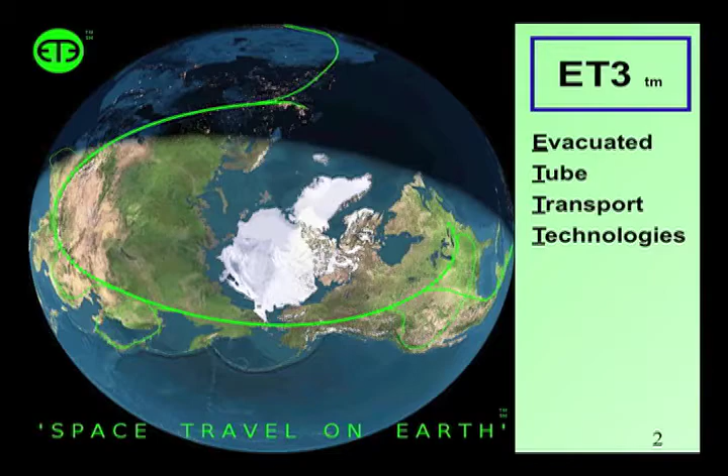So what we're doing, our vision, is bringing space travel conditions down to Earth. The vision is being able to go from, this is a polar view of the world, Florida, we're here in Colorado somewhere, but a person could get from New York up across Canada, across Alaska, across the Bering Strait, across Siberia to Beijing, China in 2 hours at 1/10 of the cost of flying.

Or products could move from any manufacturer in India or any manufacturer in China up across the Bering Strait to any Walmart in the United States in 4 hours or less. A pallet at a time minimum order instead of a shipping container at a time minimum order. And at about 1/10 of the cost.

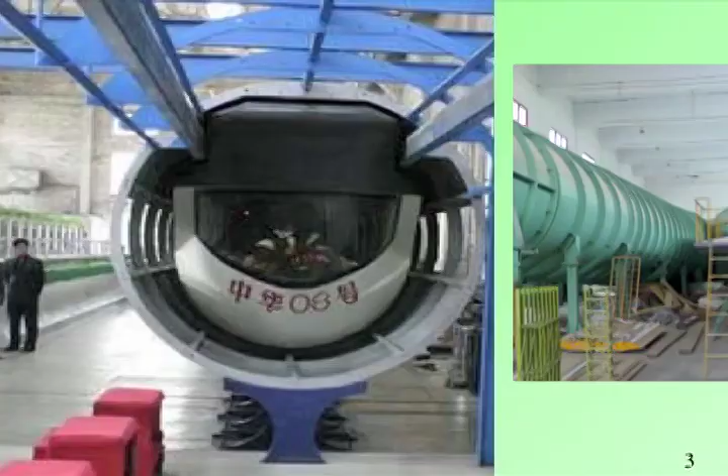Before you stop and say it's a far-fetched idea, recognize that they are doing it in China. They are building evacuated tube transport in China. We lived there for 5 months. The first trip was in the winter of 2002, 2003, and the Chinese have developed a new form of magnetic levitation. It's called HTSM. And how evacuated tube transport works is eliminating almost all of the friction associated with transportation.

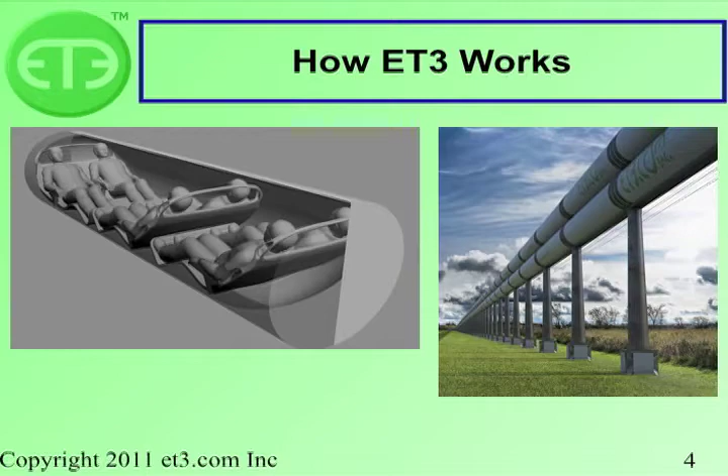When you're driving down the road in a car at 70 miles an hour, about 3/4 of the resistance is aerodynamic and about 25% of the resistance is rolling resistance. The rolling resistance can be eliminated with magnetic levitation, and the aerodynamic resistance can be eliminated by bringing space travel conditions down to Earth.

I believe that this nation should commit itself to achieving the goal, before this decade is out, of landing a man on the moon and returning him safely to the Earth.

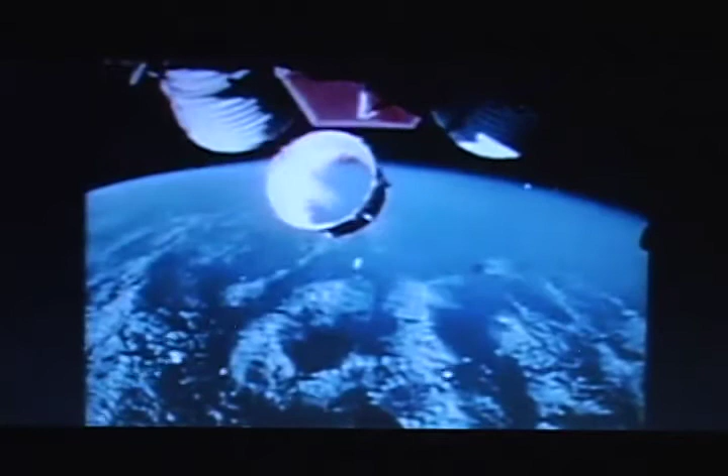The bold move of putting mankind on the moon created vast wealth and prosperity for the United States. U.S. intellectual property value now exceeds our tangible asset worth. Although manufacturing is shifting to Asia, half of global IP licensing income flows to the U.S. Evacuated tube transport is efficiency-improving technology that has benefits far exceeding what NASA created during the 1960s and 70s. Because of exorbitant costs, only a few astronauts ever experienced frictionless travel in orbit. By contrast, ETT will offer an enormous benefit of frictionless space travel on Earth for everyone to enjoy at any time. The value of ETT will dwarf the wealth that NASA-inspired IP and hardware created.

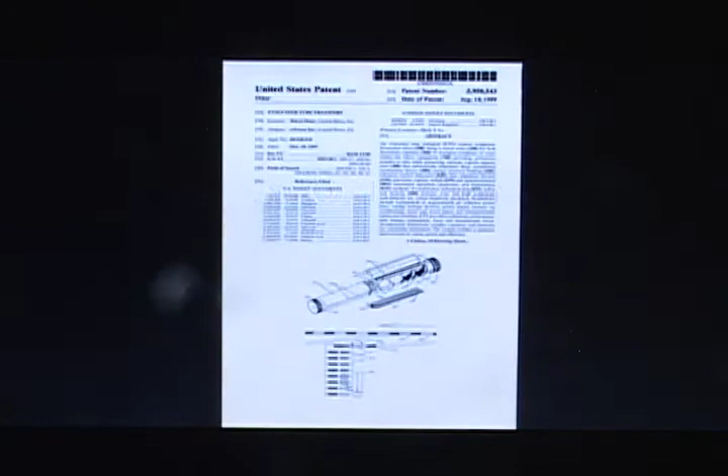The first nations to leverage ETT will trigger and ride a wave of unprecedented global prosperity. ETT will eliminate oil reliance, enhance global security, green the Earth, invigorate stagnant industries, and net millions of high-paying jobs. Most importantly, ETT will stimulate the global economy by availing an extremely high return on investments for companies who build it. ETT is a patented technology where travel occurs without air resistance or rolling resistance.

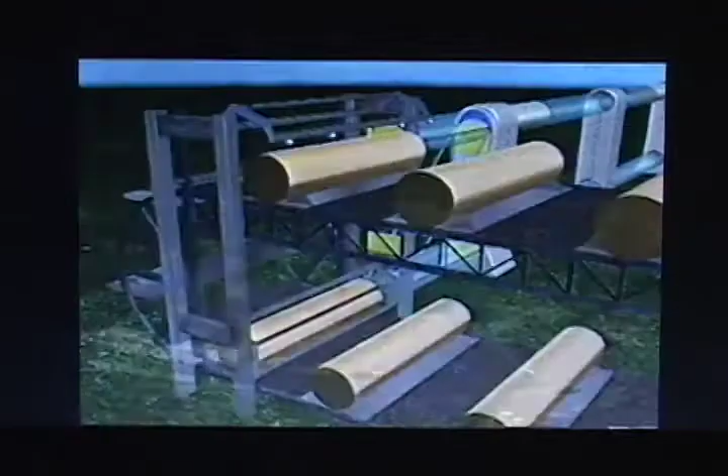ETT can accomplish 50 times more transportation per kilowatt hour than electric cars or trains. ETT is silent, ultra-safe, faster than jets, and is powered by electricity. Air is permanently removed from two 5-foot diameter tubes built along a travel route. ETT is not pneumatic tube transport commonly used at drive-up banks.

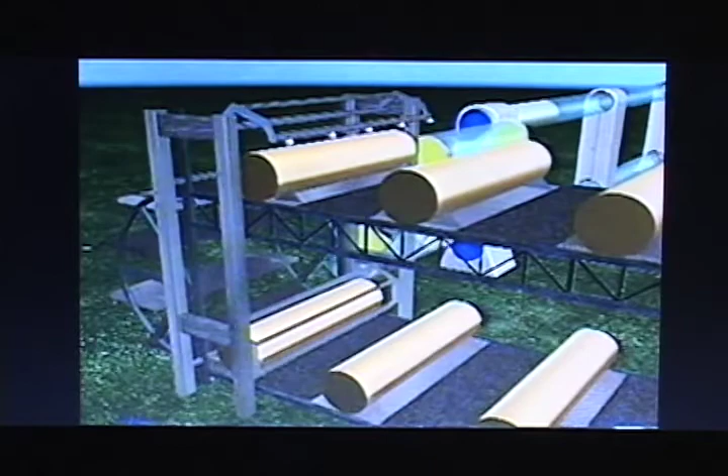Car-sized passenger or cargo capsules travel in the tubes on frictionless magnetic levitation. Airlocks at stations allow transfer without admitting air. Linear motors safely accelerate the capsules. For most of the trip, they coast through the vacuum without using any additional energy. Acceleration energy is recovered at the end of the trip by using linear generators to decelerate the capsules. ETT will eventually serve most homes.

ETT is networked like freeways. The capsules are automatically routed like internet traffic, yet a capsule can exit the system at any desired branch. Speeds of 350 miles per hour for in-state use will develop to 4,000 miles per hour for cross-country. That means New York to LA in 45 minutes, or New York to Beijing, China in just 2 hours.

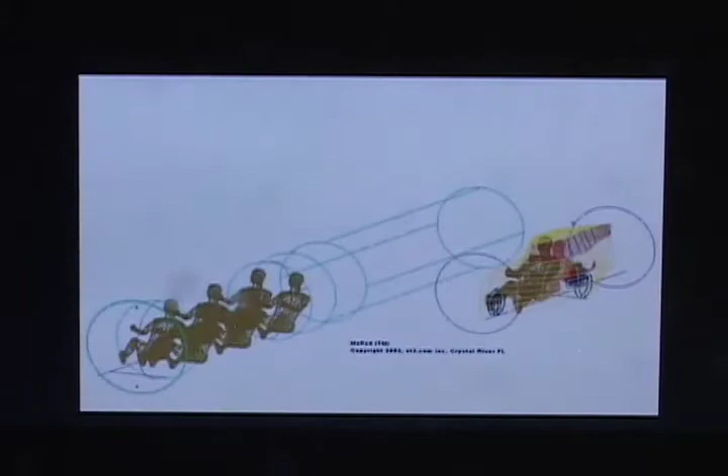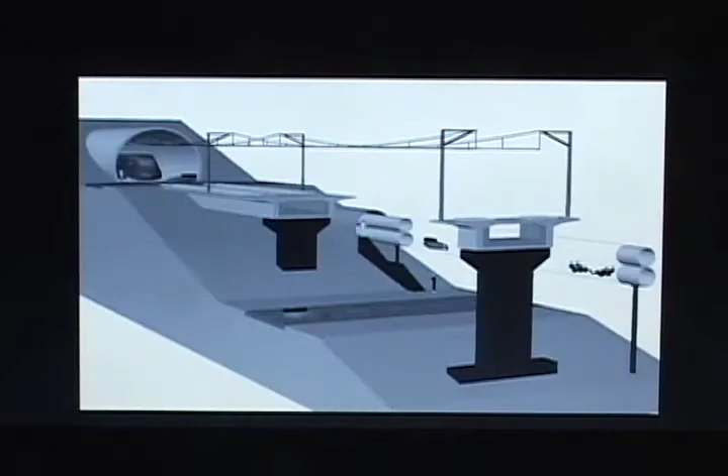Empty ETT capsules weigh 400 pounds, yet can accommodate 6 people or 3 pallets of cargo. Guideways to support ETT capsules require 1/20th the material needed to support trains. Material efficiency and automated production will drop cost to less than 1/10 that of a high-speed rail, or 1/4 as much as a freeway. Automated switching allows 350 mile-per-hour ETT routes to exceed the capacity of a 32-lane freeway.

ETT value will produce ROI high enough to guarantee private investment. ETT benefits will compound for generations. Collectively, companies have invested billions developing ETT, though most are yet unaware of it. For instance, many companies currently produce the hardware and software necessary to build and automate ETT. The technology is owned by ET3.com Incorporated, an open and growing consortium of licensees. These companies and individuals collectively network and leverage their assets to implement, manage, and improve ETT.

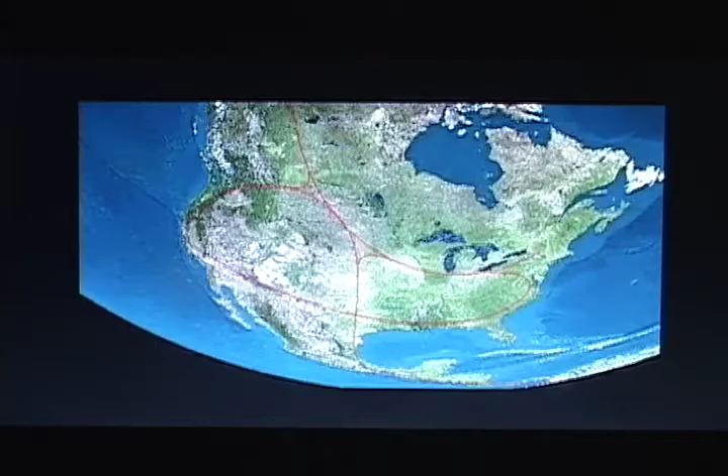Private investment of $500 billion in optimally placed ETT routes will displace up to half of U.S. transportation. The manifold annual return on this investment will include a direct savings of $1.4 trillion, time savings of $625 billion, environmental benefits over $200 billion, security benefits of $70 billion, and 20,000 lives saved annually from automobile accidents. This totals almost $2.3 trillion per year.

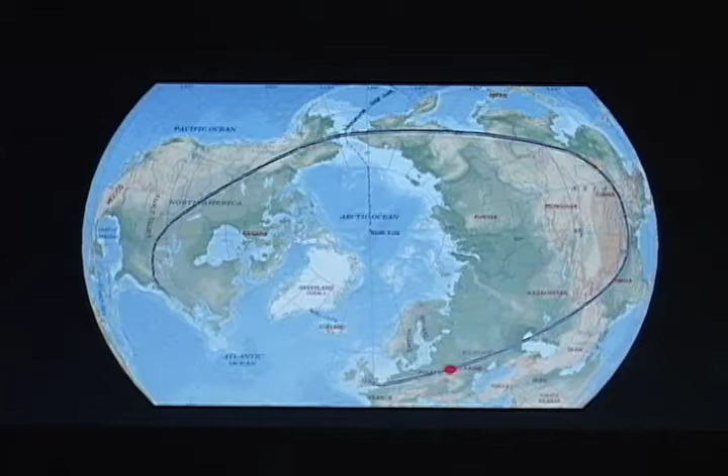Secondary benefits include economic expansion, better distribution of commodities, improved global standard of living, real estate value appreciation, and accessibility to education and markets, to mention only a few. Building a 14,500-mile ETT backbone from New York to London via Alaska, China, India, and Europe for less than $1 trillion would capture 10% of the $8.5 trillion global transportation pie by connecting major population and production centers.

Traveling from New York City to Beijing in 2 hours on ETT with a comparable fare to flying would yield 90% profit margin. This allows greatly reduced transportation cost. China recognizes the immense value of ETT and holds a 5-year advantage over the U.S. in its implementation. Instead of waiting for others, we have a patriotic duty to leverage our advantage on intellectual property and be the first nation to commercialize ETT.

We can boldly create unprecedented environmental, social, and economic returns through ETT. This will usher in an age of global prosperity for many generations. The United States will enjoy enormous profits by providing transportation, just like Saudi Arabia sells oil.

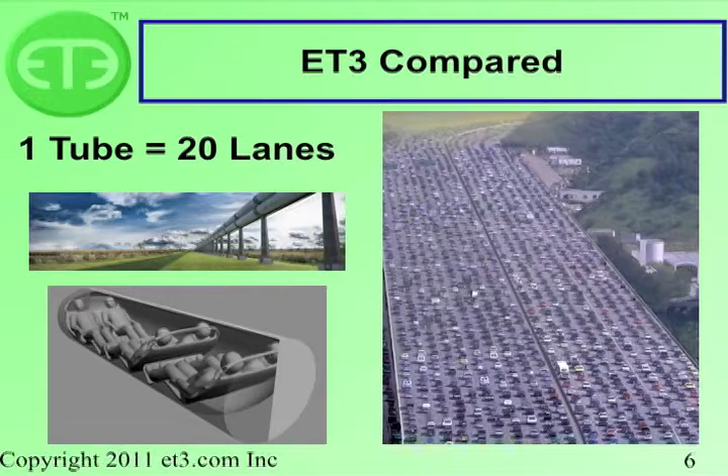In ET3, one 5-foot diameter tube at a design speed of 350 miles an hour can accommodate 20 lanes of freeway traffic. So a 2-way system is the equivalent of a 40-lane freeway. That's at a design speed of 350 miles an hour, and that's only using 1/3 of the theoretical capacity of the tube. At a design speed of 350 miles an hour, that's 513 feet per second. If we only use 1/3 the theoretical capacity and the vehicles are 16 feet long, the nose of one vehicle to the nose of the next vehicle, 50 feet, that's 10 vehicles per second.

Now if you double the speed, you still have 10 vehicles per second, but now you're moving at 1,000 feet per second. So you divide that out and you have 100-foot spacing between each vehicle. So now every time you double the speed, you can merge those 2 lanes together just like a zipper going together, and you've got twice the capacity. The capacity scales with the design velocity. So at 4,000 miles an hour, it's over 100 vehicles per second capacity.

A single pair of 5-foot diameter tubes going across the Bering Strait could carry every single pallet on every single container in every single container ship going between China and the United States. The capacity of ET3 is phenomenal. It takes a lot of airlocks to exploit the capacity, but ET3 is granular compared to rail that needs a Grand Central Station and a bunch of people funneled together to justify that huge capital expenditure. ET3, on the other hand, is more like a freeway philosophy where the exits in the system can be added according to demand, just like exits on a freeway. So it's much more granular, about 10 times the granularity of high-speed rail.

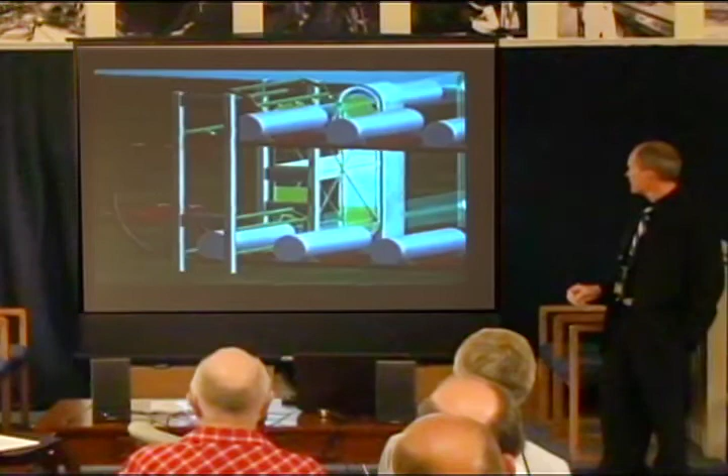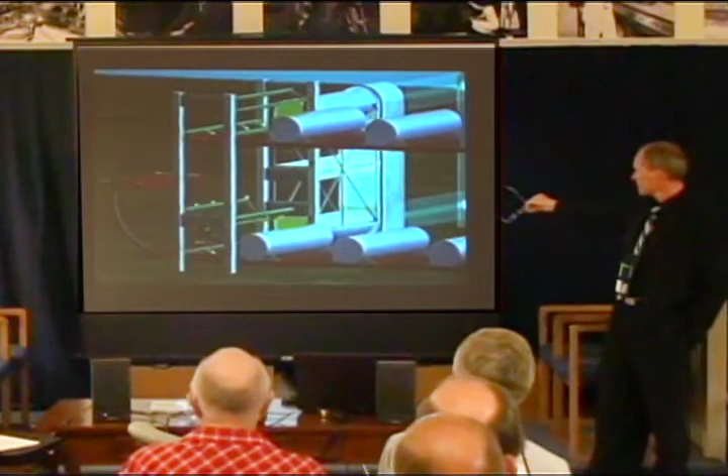The airlock. You just saw a capsule enter the tube. In the lower airlock chamber, it's exchanging with the upper chamber so it can accept the inbound capsule because it's evacuated. When the capsule goes into the lower chamber, it displaces almost all of the air that's in there. Then the two gate valves close, and when the two gate valves open, it can go into the tube without letting any air in. So the capsule itself does most of the work of evacuating the chamber.

Now, what you'll do is when you drive up to, say, a Walmart store - about 90% of the population of the United States is within 15 minutes of a Walmart store. So that's kind of our target for the initial profitable implementation: disperse access portals with about the frequency of a Walmart store, about 1 per 20,000 population or so.

So the experience would be you park your car at the Walmart, you walk across their store and buy the last minute things that you need. Walmart's very happy to have the airlock at their store so they can bring product in at much lower cost and much less time from manufacturers in China and India. And all these people walking across their store to use the access is going to increase their revenues, and they can charge them to access the portal.

So what you'll see is a moving walkway that you step onto, and a capsule will be right there moving exactly the same speed that you are. Just like the Disney mechanisms - who's been to Disneyland? Those have about a 15-second queuing time to queue people in and out in a continuous process.

So the vehicles wait for the people instead of the people waiting for the vehicles. It's not like at an airport where you have to aggregate 200 to 400 people to make that flight efficient. The vehicles are car-sized and leave more with the frequency that people walk through the door.

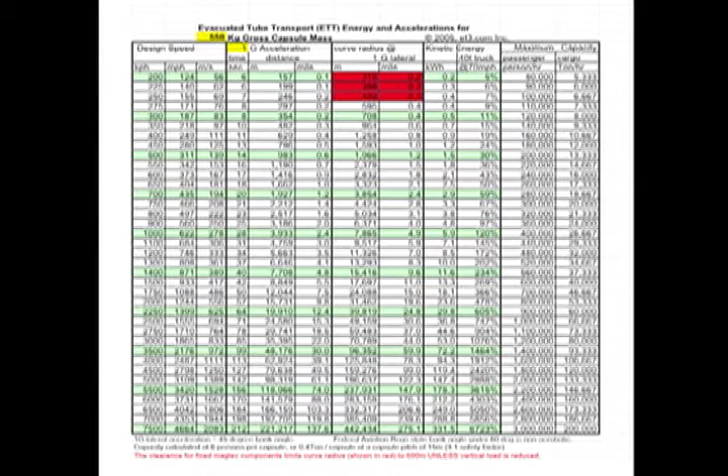If we're looking at a design speed of 350 miles an hour, let's say line 23, the time it takes to get up to that speed is 16 seconds. You've traveled 1,190 meters, 7/10 of a mile, to accelerate up to that speed — let's call it a mile since it's 350 miles an hour instead of 342. And the minimum curve radius is about 1.5 miles.

This is the passenger capacity in passengers per hour, or tons per hour of cargo. This is the amount of energy compared to a 40,000 pound truck — about 1.8 kilowatt hours of electrical energy, kinetic energy in the capsule. That's about 2 cents worth of electrical energy, or 20 cents at retail, 10 cents a kilowatt hour.

If we go up here to 4,000 miles an hour, then we're looking at 103 miles to accelerate up to that speed.

If we look at a freeway situation, most of the infrastructure, paved roads in the United States are not freeways — they happen at slower speeds, with switching and everything occurring there. It'll be the same thing with evacuated tube transport: most of the guideway will be at design speeds of maybe 350 to 500 miles an hour.

You're only looking at a mile to accelerate up to speed, merge into the flow of traffic, with a minimum curve radius of about 1.5 miles. So a lot of that can take place on existing freeway right-of-ways.

It's just like a freeway. Ideally, the freeway is a network, meaning it's all interconnected together.